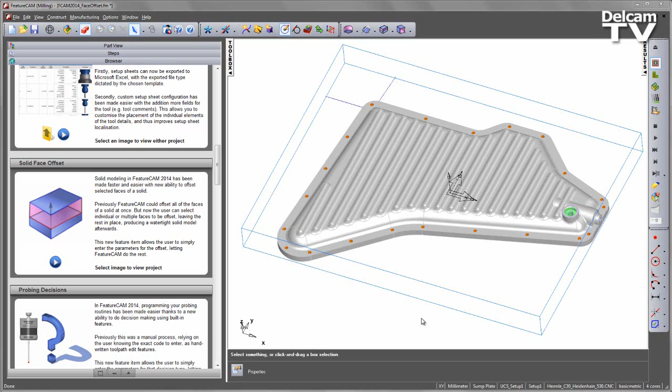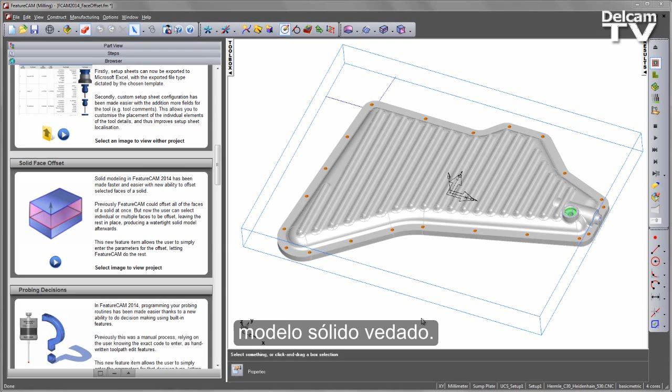Solid modelling in FeatureCAM 2014 has been made faster and easier with the new ability to offset selected faces of a solid. Previously, FeatureCAM could offset all the faces of a solid at once, but now the user can select individual or multiple faces to be offset, leaving the rest in place and producing a watertight solid model afterwards. This new feature item allows the user to simply enter the parameters for the offset and let FeatureCAM do the rest.

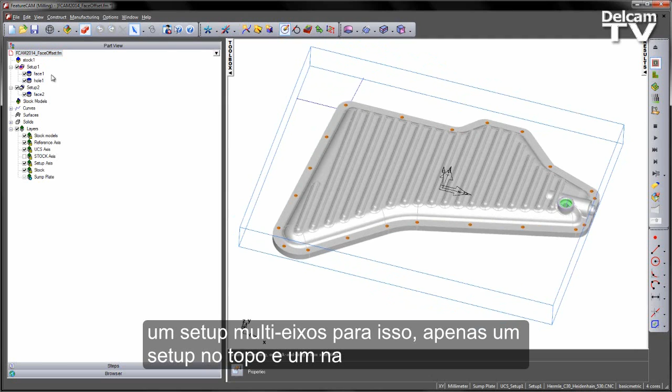In this case, you can see we've got a sump plate part, and what we want to do is generate a cast model for this and just simply machine the areas that we have on the component. I haven't got a multi-axis setup for this, I've just got simply a setup at the top and a setup at the bottom.

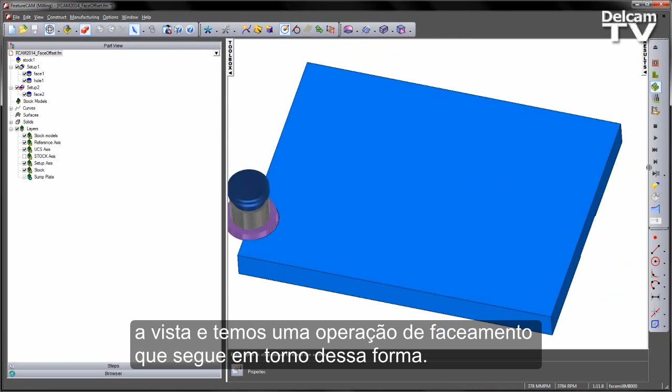If I do a 3D simulation, you'll notice that our stock is a block in this case. I can go ahead and just do simulate of all those items on this face. I can switch to my setup number 2, rotate round, and you see we've got a facing operation that follows around that shape like so. But this doesn't really give us a representation of what it looks like because we want to work from a casting.

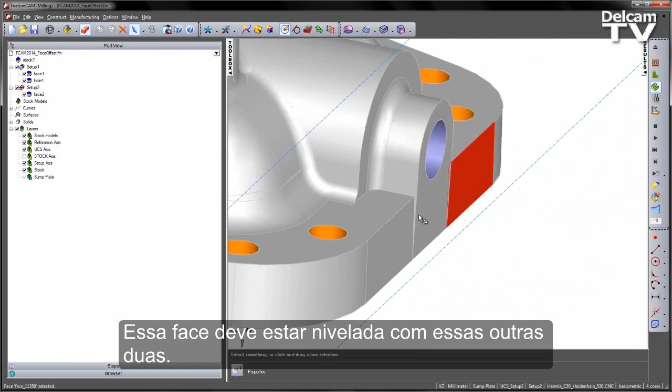So we're going to use the solid modelling to generate the casting for us. As I rotate round, the first thing I want to modify is the angle of this face here. This face should be flush with these two here. I can use the draft function under our manufacturing options and our solid toolbar. Note that I've put the solid toolbar in my interface just by simply selecting the solid option. This is a cost option, so we license this separately as a different module within the FeatureCAM suite.

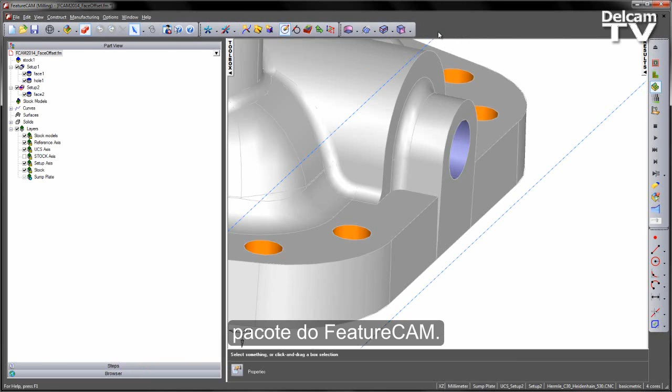So I need to set a draft angle between these two. I can find out what that angle is just by simply measuring the angle between two lines. In this case I can create two lines there and check what the angle is between those two. It's telling me it's 2 degrees.

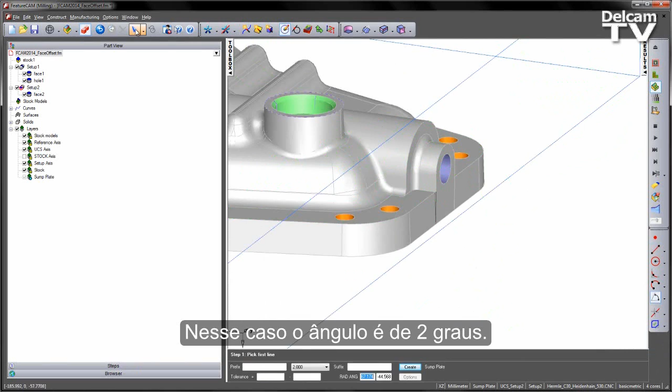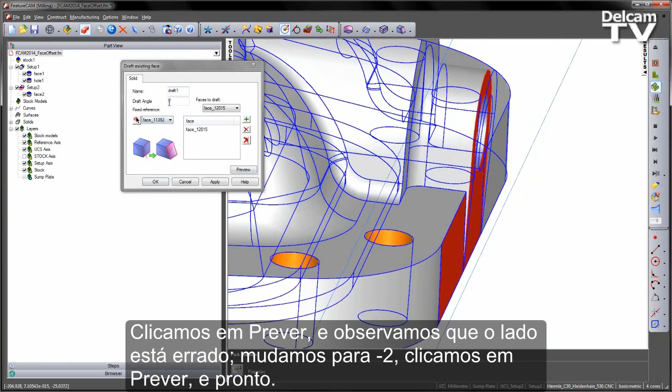Let's remove those lines and go ahead and do a draft operation. I'm going to select draft face, choose this face as my reference, and choose this face as the one I wish to draft, setting a draft angle of 2 degrees. We can preview this - it's going the wrong way, so let's change that to -2, preview, like so. Say apply, and OK. That repairs and creates a single face with the same draft angle.

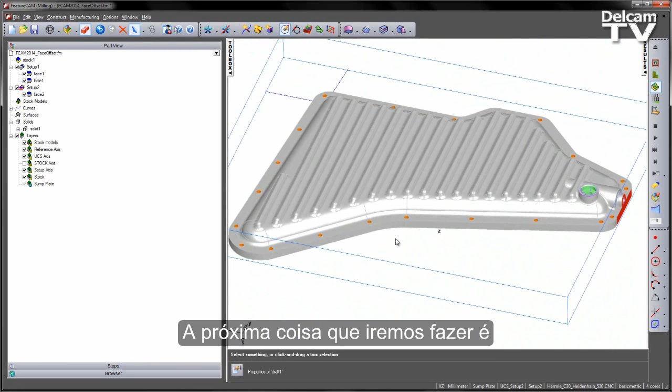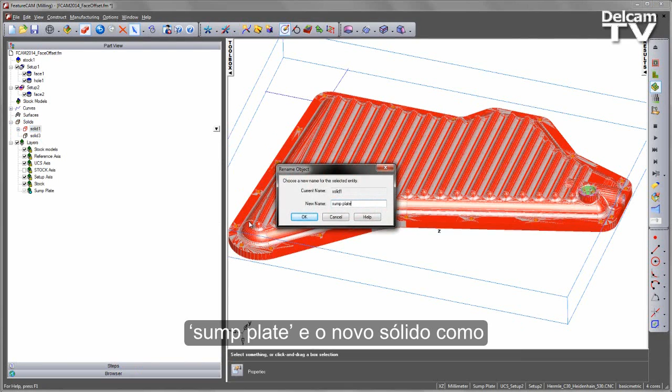That's the modification to my part file itself. The next thing I want to do is generate a cast stock from this. So I'm going to create a copy of my solid - say copy, then paste this in my solid menu. I'm going to take the original solid and rename this one sump plate. Then take my new solid, rename this one, and call it cast stock.

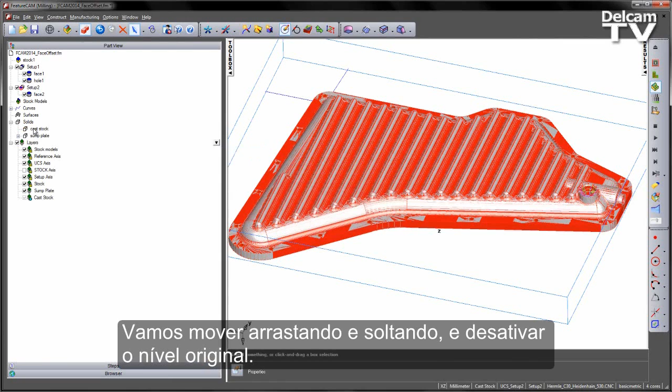We can also generate a new layer to separate these two out, so let's create a new layer, again calling this one cast stock, and then I'm going to move this just by dragging and dropping and turning off the original layer.

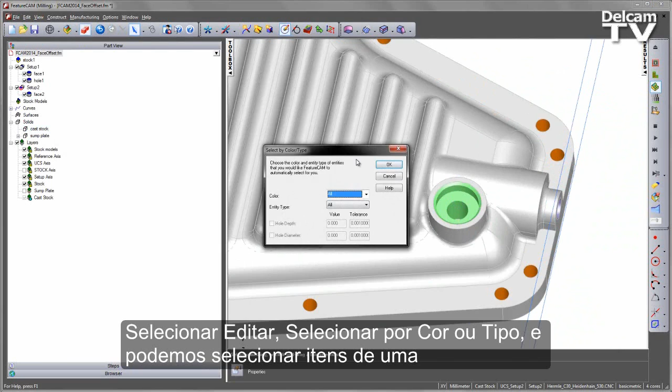Now that I've got my new model, what I want to do is first start removing some of the detail. You'll notice all these holes will have to be machined, so we can go ahead and select these. I'm going to do edit, select by colour or type, and choose anything that's a particular colour - for example, everything that's green on the solid. I say OK, and that identifies those regions. I can then go to my manufacturing menu, use delete face, select modify existing and heal remaining, preview and apply to remove that detail.

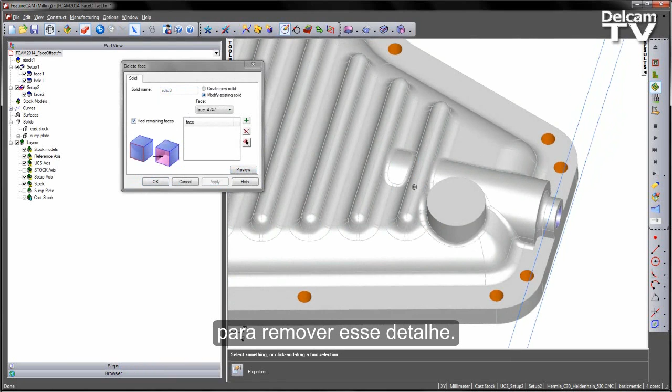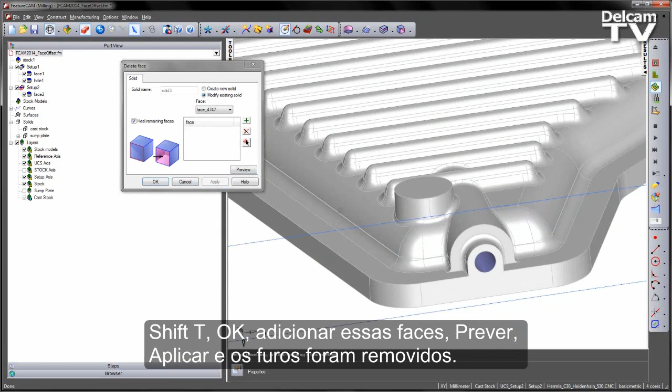We can repeat this process. My edit by selected colour or type has a customised shortcut, Control-Shift-T. I'm going to select one of the orange faces, Control-Shift-T, say OK, add those faces in, preview, apply, and those are removed. We can also repeat for this purple region here, so again select.

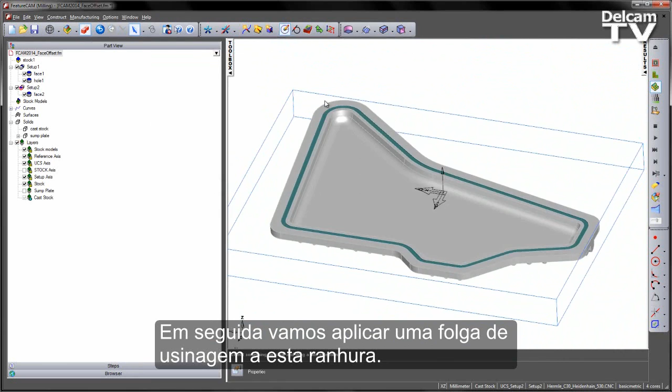Next thing I need to do is provide some machining allowance for this slot here. To do this, I'm going to use the new offset tool, which is under the shape modification menu. You'll notice the new icon here is face offset - offset will do the whole solid.

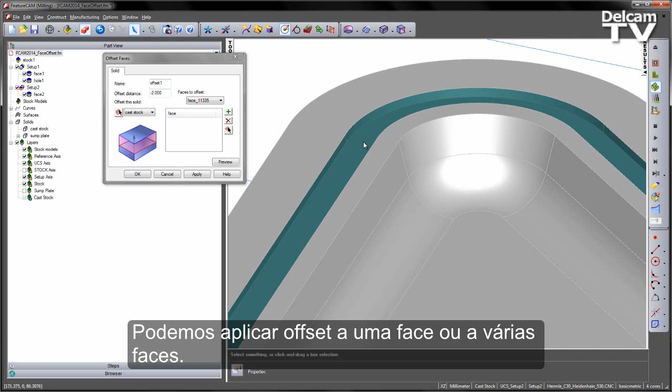It's offset faces. I can select that, and then choose the faces I wish to offset. I can either do a singular offset with a single face or multiple faces. I'm going to select everything that's this bluey green colour, except that bottom face, and just add those in. I can now apply an offset distance - in this case 2 mm, preview - and you should notice that slot has been made narrower.

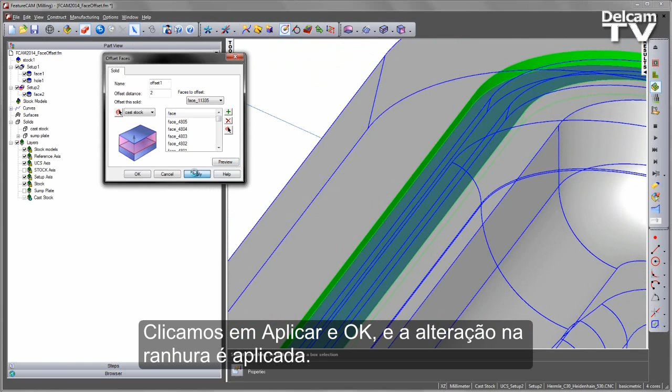I can say apply and OK, and you'll see we get the change in that slot.

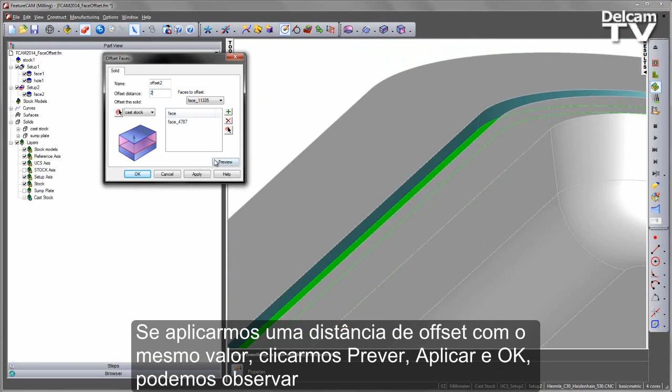I can also use the offset on a single face. For example, I can select the bottom face here, add that in, and in this case the depth of this feature is 2 mm. So if I did an offset distance of the same value and preview, say apply and OK, you'll notice it removes that feature completely. So the offset can be used in different ways to allow for different things on our part.

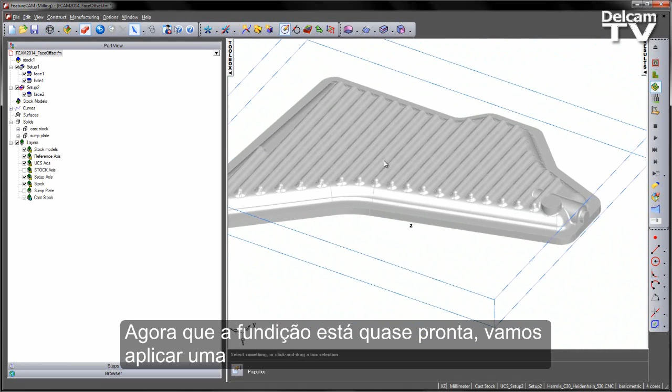Now that I've created the casting as far as I want, I just want to allow for some machining allowance in some of these areas. In this case I'm going to select this face region here, and add a machining pad to this.

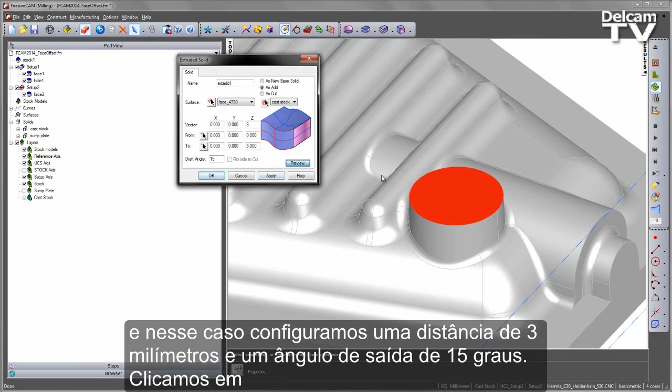I'm going to use our option to extrude a surface, apply an add to this face, and set a distance of 3 mm and a draft angle of 15 degrees. If I preview this, in this case I just want to go to -3, and the draft angle is -15. Preview again, and you should notice the taper that will clearly indicate to us the machining area.

Say apply, and then we get our machining pad like so.

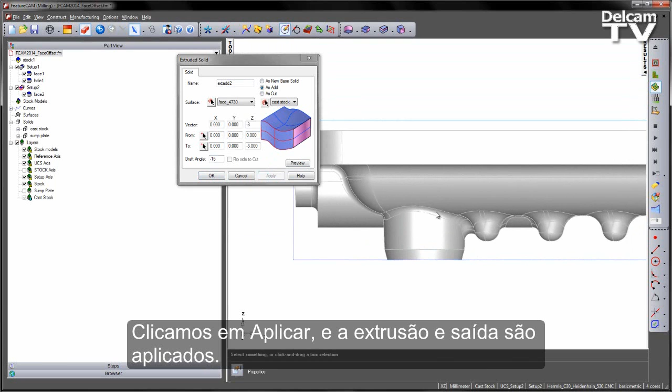This can also be repeated for this area here as well. Again I'm going to select this face instead, preview, and again we need to flip the direction, so we're going to set this to be 3, preview, and again look to the side just to double check that we have the correct draft angle.

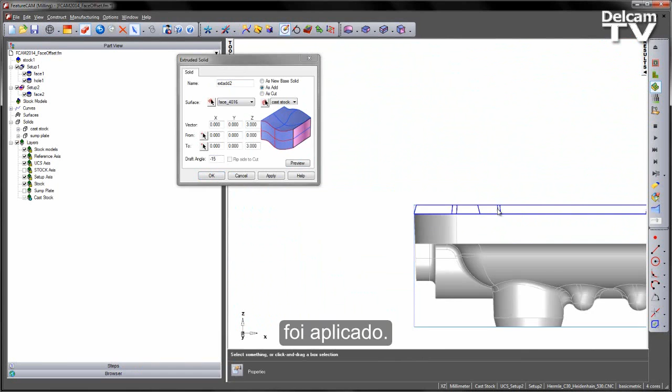Let's go ahead and accept those. I've now got my cast stock with my machining pads like so.

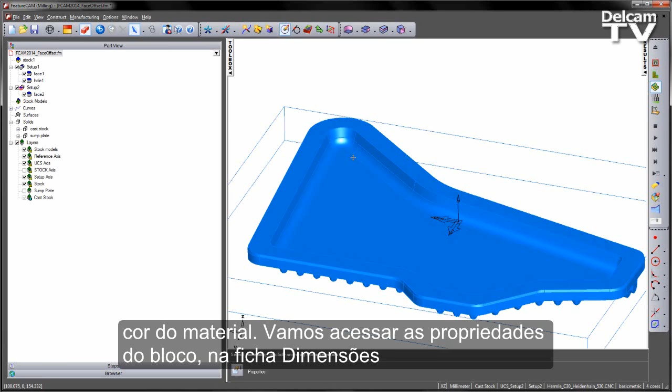We can change the colour of this. Let's select the solid. Into our colouring, I'm going to say change selected, and make that the same colour as the stock. We can then go into our stock parameters, into the properties, and choose a user-defined cast stock.

I can now activate my sump plate and hide the stock for the time being, and you should see we've got a nice representation of our stock material.

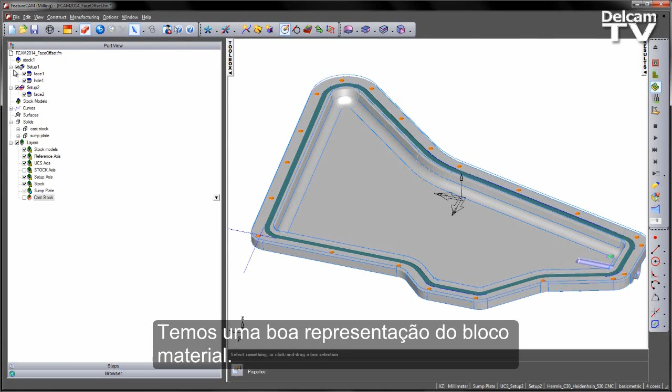I can then rerun through my simulation. Let's do a single step and just rotate to the front - we can see we've got our cast stock like so. I can play through the machining sequence just to check my part, rotate round, and switch into my second setup, just verifying that we get our facing operation around the part like so.